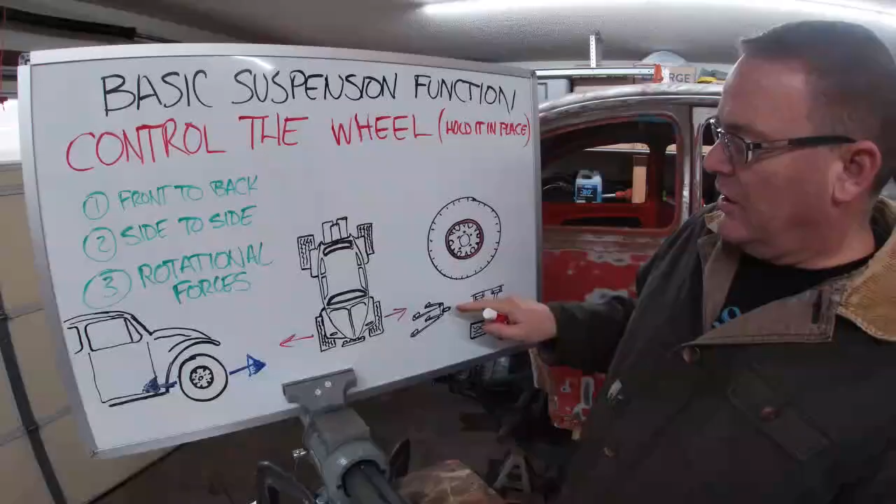Now this is going to sound weird, but you've also got to keep it from spinning. How you do that is basically the upper and lower ball joints, or in my case I'm going to be using Heims - they hold it. So when the wheel turns or when I hit the gas, it's not going to move. It keeps the rotational forces down.

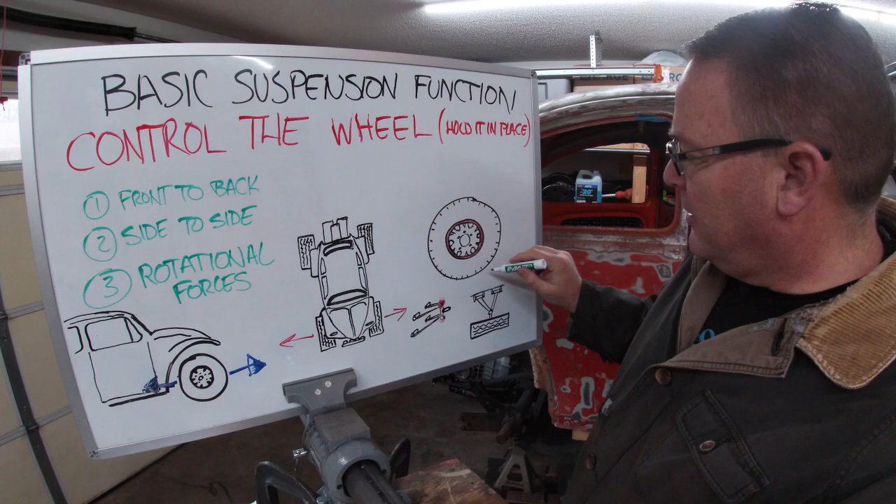Let's say you hit the gas - this is the front. If you hit the gas and the wheel spins, that's it going this way. Well, Newton's law: for every action there's an equal and opposite reaction. That means as you're spinning this way, the equal and opposite rotational reaction is spinning this way. And that's how you do wheelies - you hit the gas, and what does it do? It picks up the front end. The reason it can pick up the front end instead of having the tire just roll and fly off your car is because it's fixed to the suspension, and the suspension keeps the rotational forces in check.

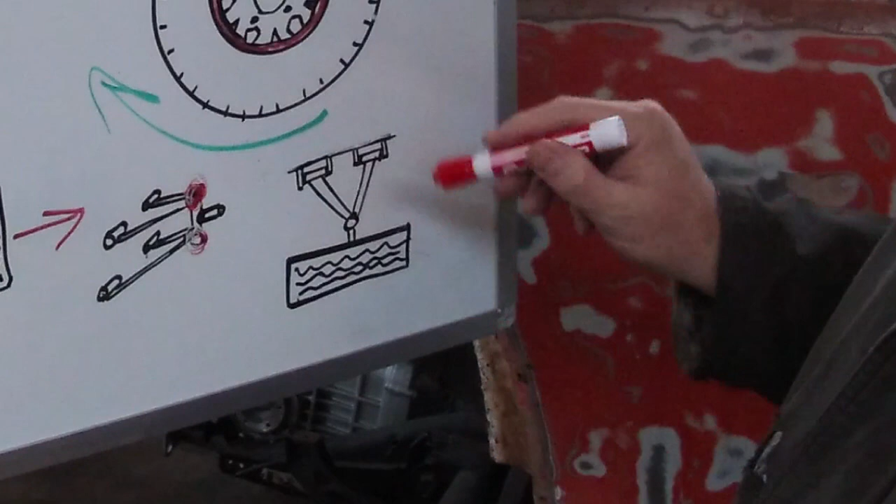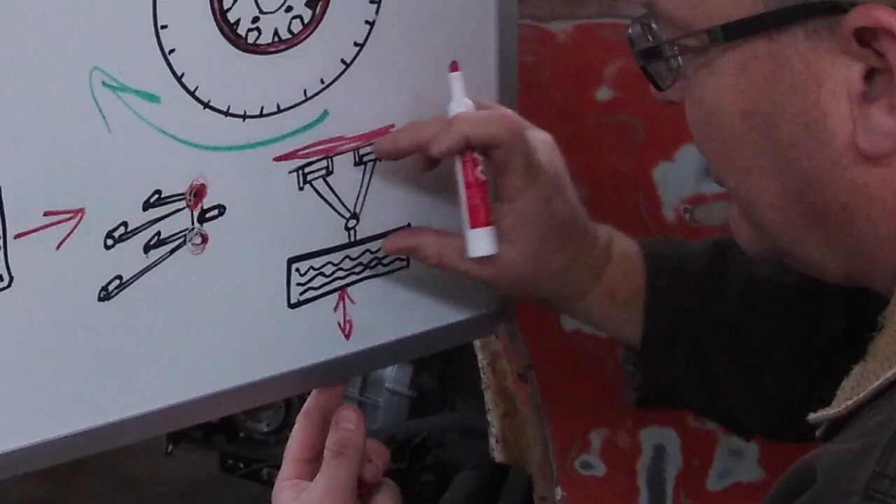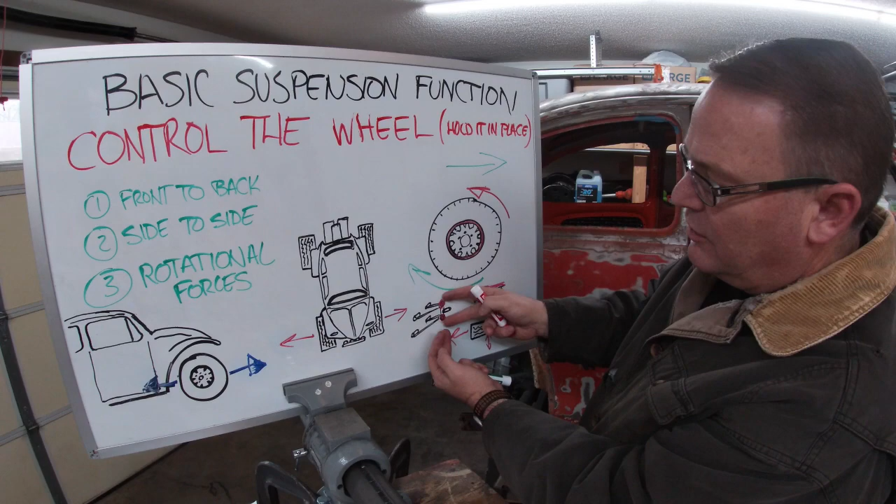Similarly with the A-arm suspension - this is just a quick top view - the A-arm itself, connecting it to the frame here, this triangle motion not only holds it side to side, but also holds it front to back. And because we're using two A-arms, an upper and lower, it's keeping it from spinning. So as you apply the brakes, or on the back apply the gas, these two points hold it in place, and therefore it can't twist off your car.

What I really want to talk about is the planning that goes into finding your overall vehicle width. If you're planning out your A-arm suspension, what do you need to figure out? There are basically five measurements you need if you're trying to figure out your overall width.

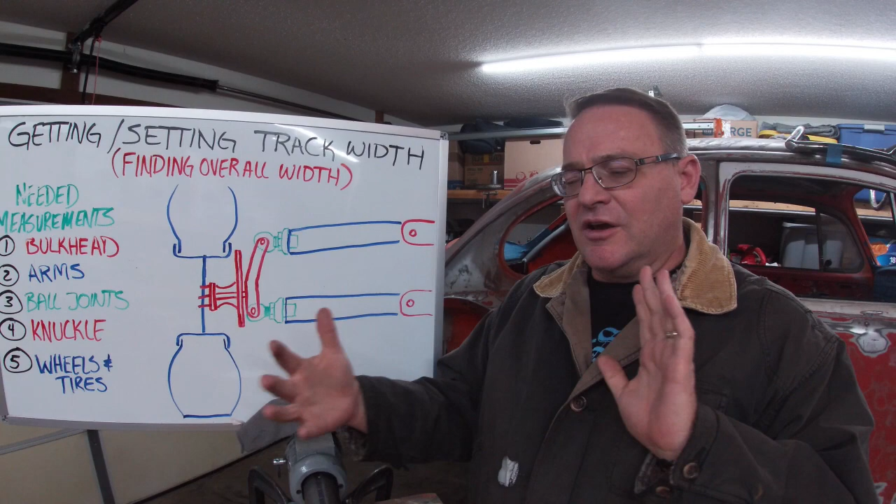For me, I'm looking for somewhere in the neighborhood of 76-ish inches of total width. That's what I would like. So the way I go ahead and do that is I need to know key information.

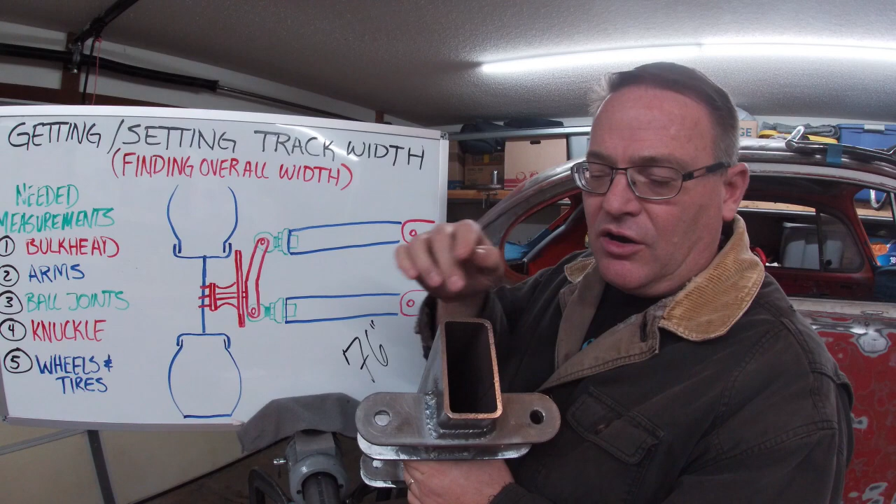First, the bulkhead - how wide is my bulkhead? Like you saw in the last video, I built my bulkhead. I'm using the shackles as my tabs, and they are center to center 6 inches. So this measurement here is 3, because that's only half - so you've got 3 inches there.

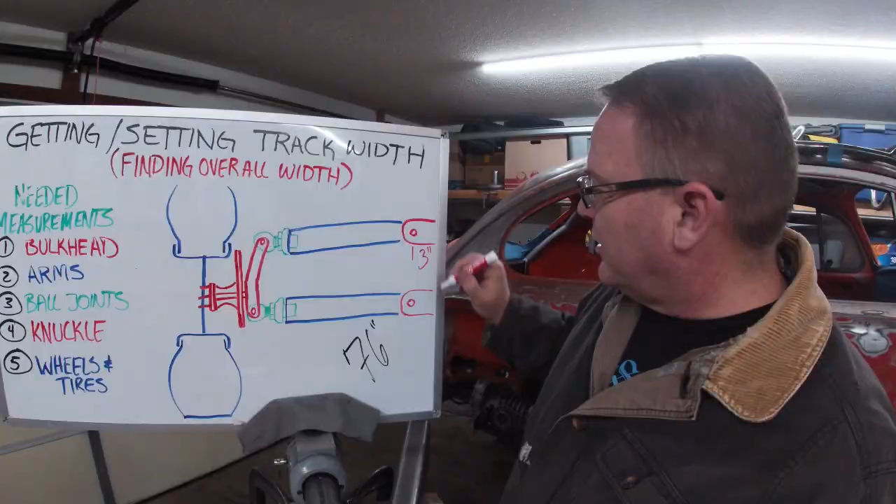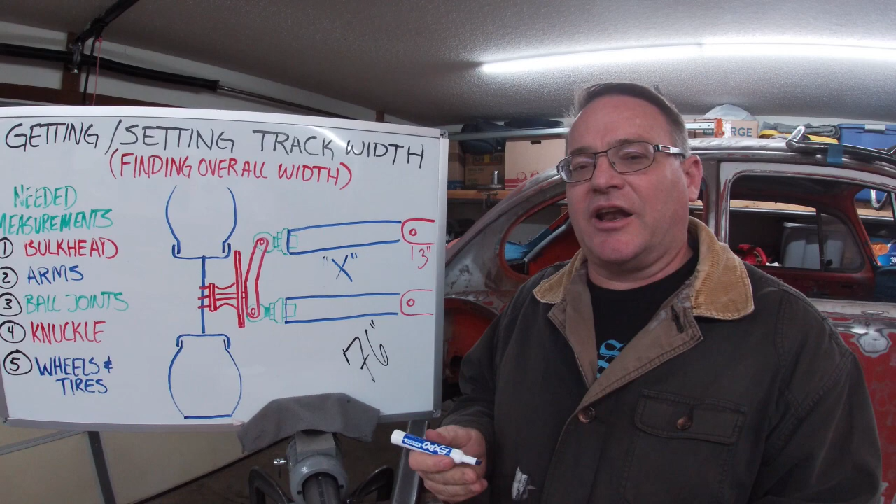The next measurement is your arms themselves, the A-arms. We're going to call that X because that's a variable - I could change that to make it so I hit my number.

So the A-arm length is from the center of the pivot to the end of the arm.

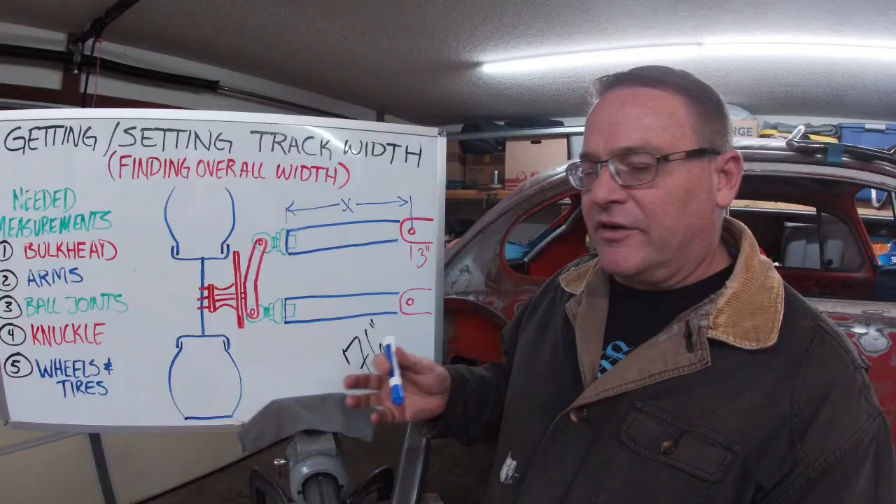The next one is the ball joints or the heims. I'm using a heim. Some of you guys have arms, you'll see them, I'll put a couple pictures. Some of the arms have the ball joint incorporated in the arm. If that's the case, you just take the overall width of the arm. But because I'm using weld-on bungs, I go from the end of the arm to the center of the ball joint or the heim.

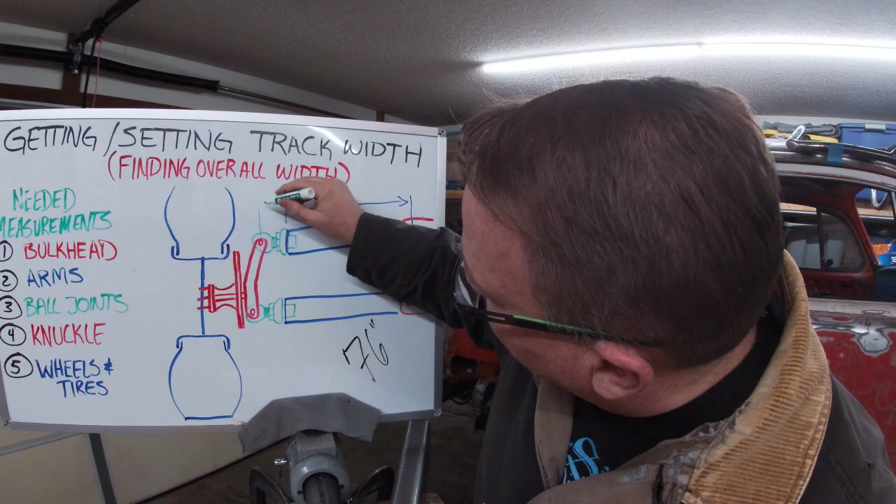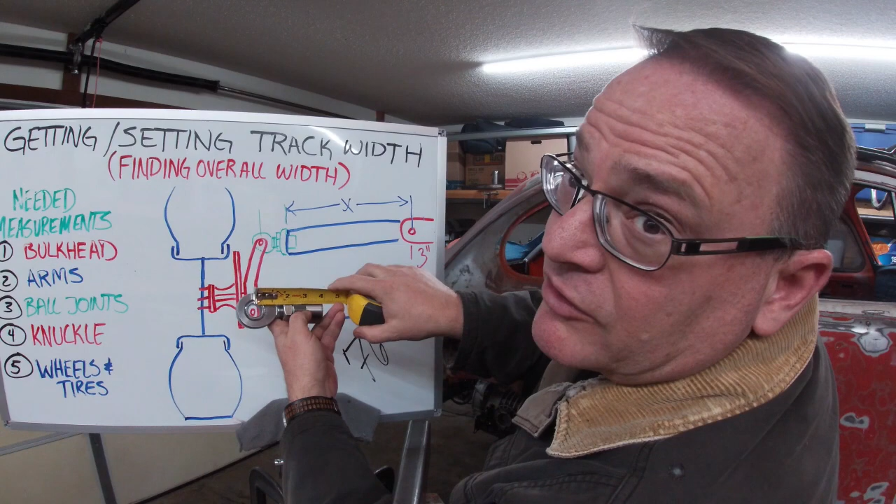So this is my heim. Take a measurement from the end of the heim or the end of the weld-on bung to the center of the heim, and that looks like 2 inches to me. So that is 2 inches.

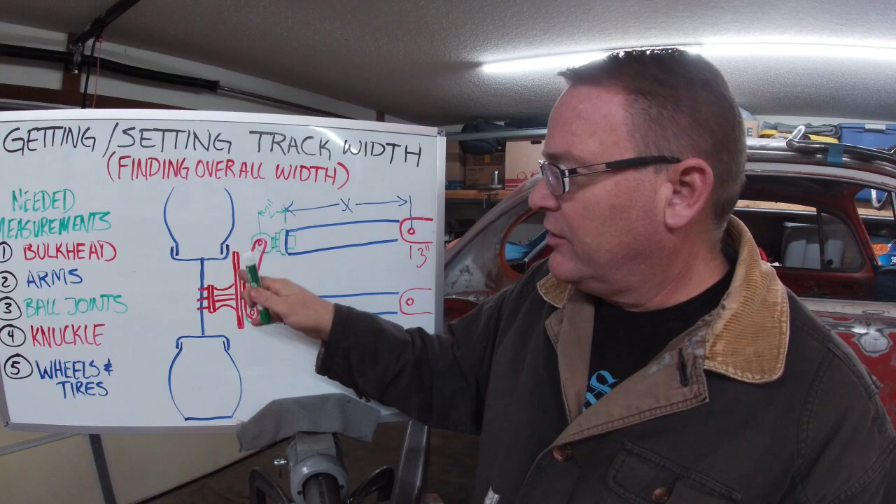Now let's figure out your knuckle. This is the knuckle. Basically, I just got an off-the-shelf buggy knuckle, this one I got from Apple Tree. They sell them also at Kartek, so you could actually get these wherever you like. Mine has, you get them in different sizes. I got mine in the 2-inch hollow.

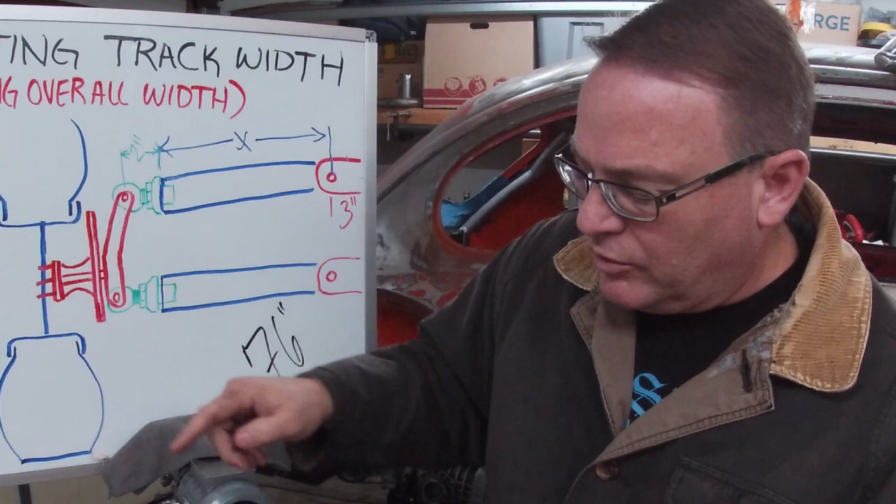Now, when you're getting the measurement of the knuckle, you need to have your brakes as well, because what you're going to do is go from the center of the ball joint slash heim to the wheel mounting surface. So I have my brakes here, and this will fit just like that. So what I did is I combined my knuckle with the hub and the brakes and everything, and then got the measurement from there. Now, I'm not going to do it good here, but

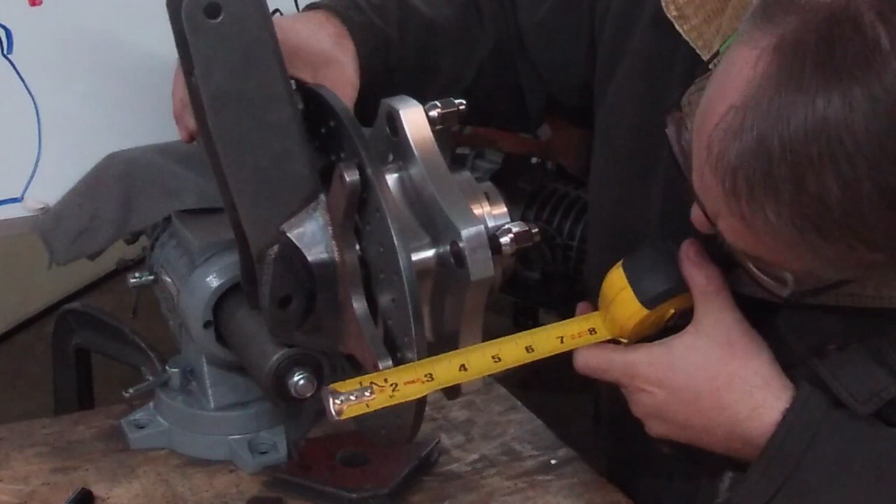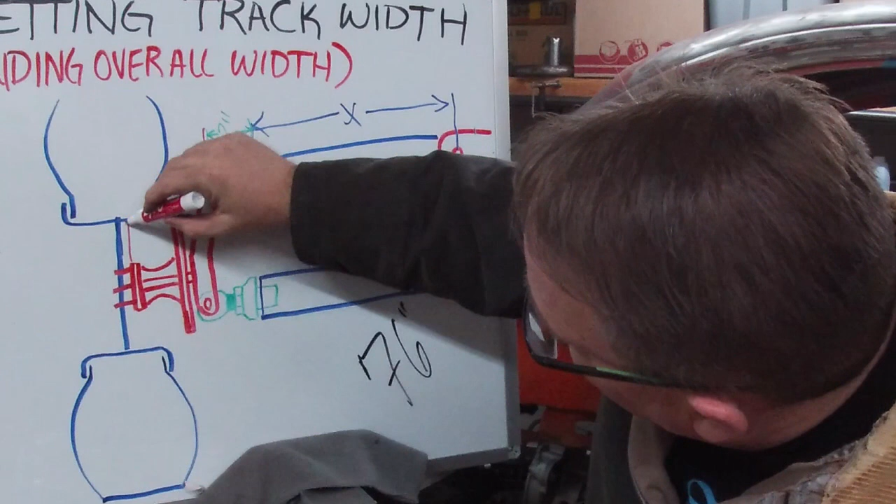Trust me when I tell you it was 5 inches. See if I can get close. Yep, pretty much. Again, I'm going from the center of this to the outward face of this, because this is where my wheel mounts. So that's 5 inches. Again, you're gonna need your hubs and your knuckle to figure that out. I always keep my spindle lock nut on just to protect the threads. So from this point to this point is 5 inches.

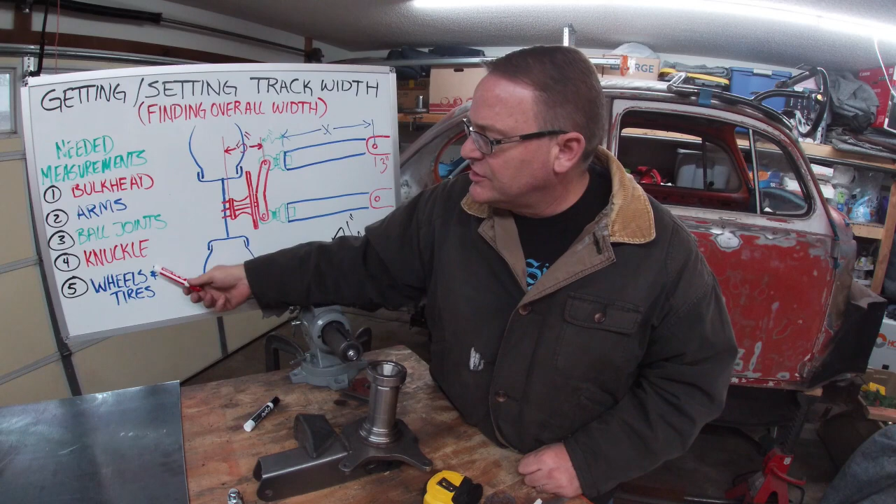All right, so we've got the bulkhead, 3 inches, the arms question mark, ball joints 2 inches. I should have put that down here, but it doesn't matter. Knuckle, 5 inches. The last one is the wheels and tires.

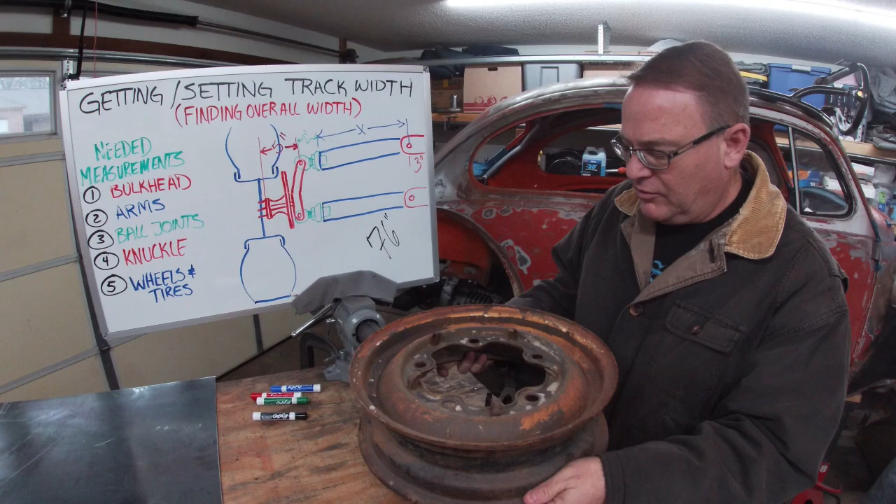All right, I'm just playing around. Probably notice I do that quite a bit. So I am going to mount this stock rim to my hub. Oh, anyway, so yeah, that's it.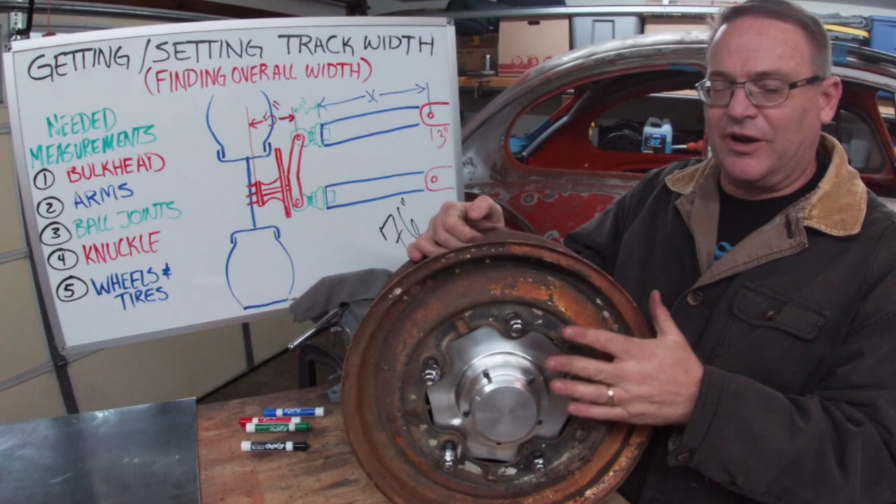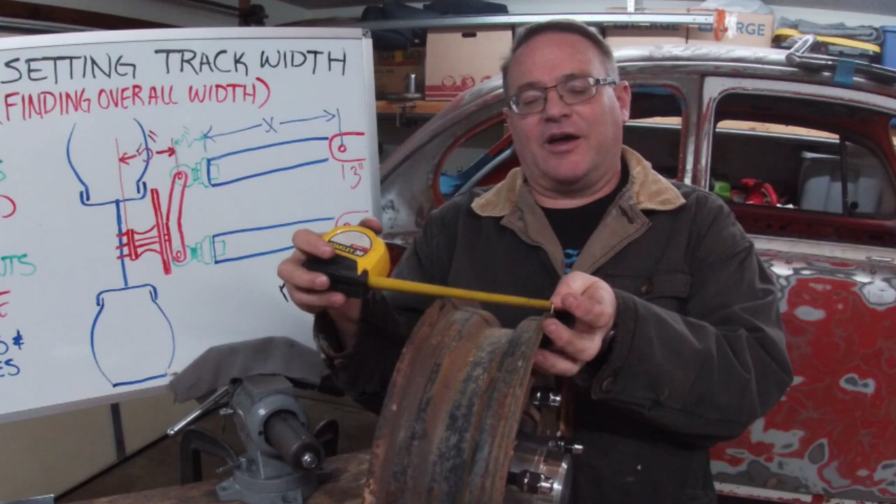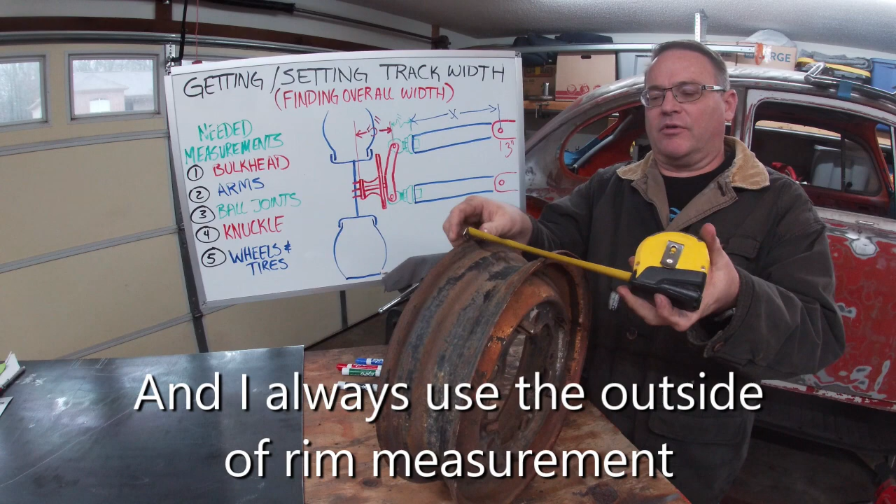So what you want to do is, whatever rims that you decide on, these are 15 by 5, I think, or 4, depends on which side you go on. If you go to the outside, it's 5. If you go onto the inside, it's 4. So how do you figure out what kind of width you're going to get out of these? I'm just going to use this as a 5-inch wide rim, okay, even though it's probably 4 because it goes to the inside. But because it's on the outside, you'll see why I'm going to measure from the outside and use that measurement in a second.

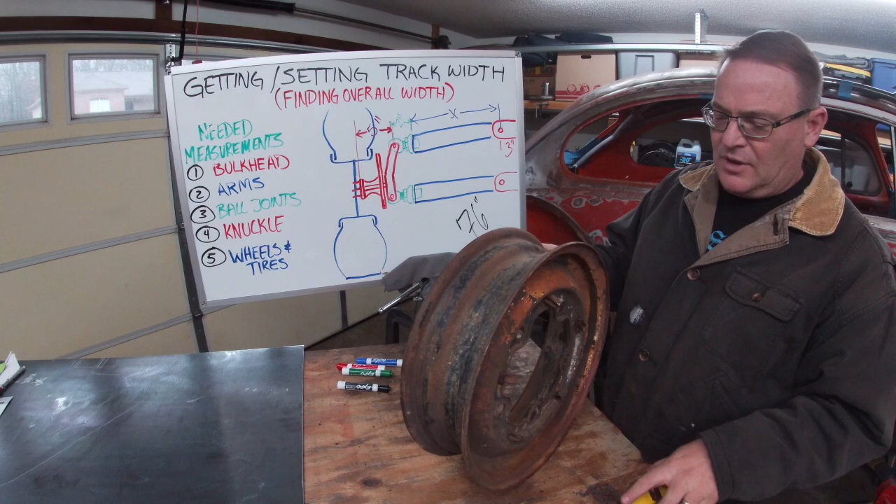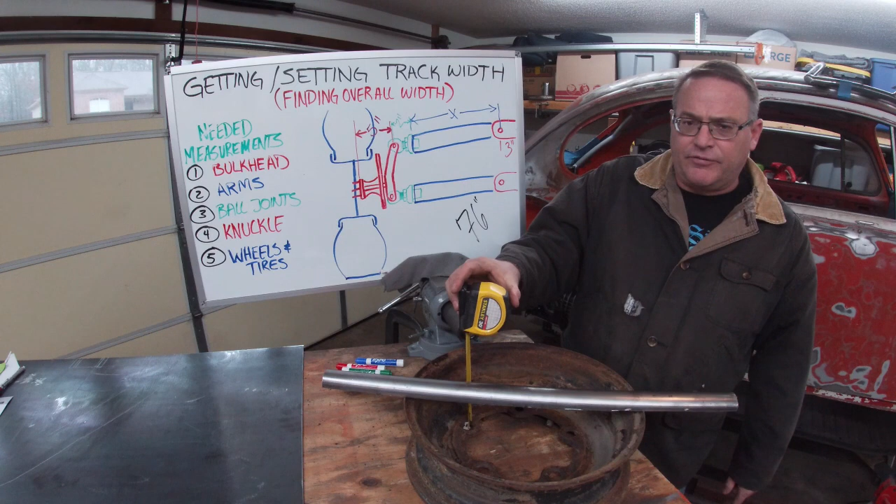Now I need to find out what the back spacing is. The back spacing is typically measured and printed in here, but I can't find it, there's too much crap, I need to sandblast this thing in order to see it. So what I do is I find a straight edge, put it down, and I'm measuring to where the tire or the rim is going to sit against the hub. So that is 4 inches. It's a 5-inch wheel with a 4-inch back spacing. That's insane. So 4 inches, right?

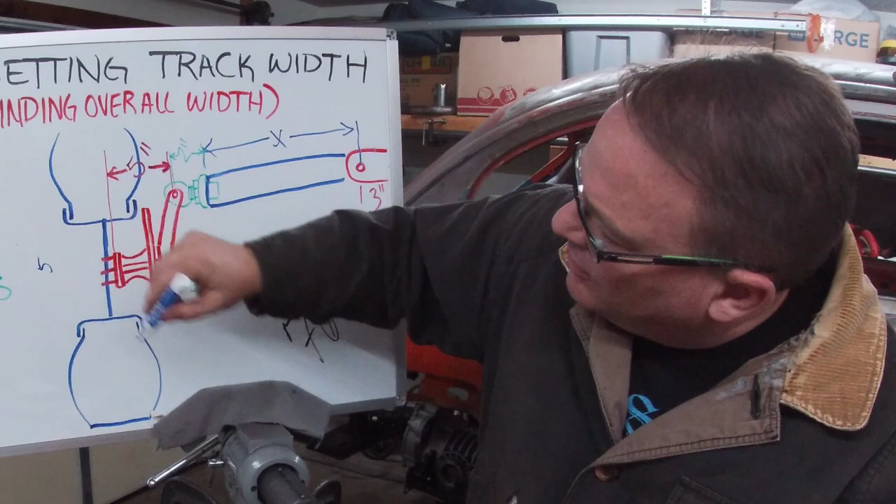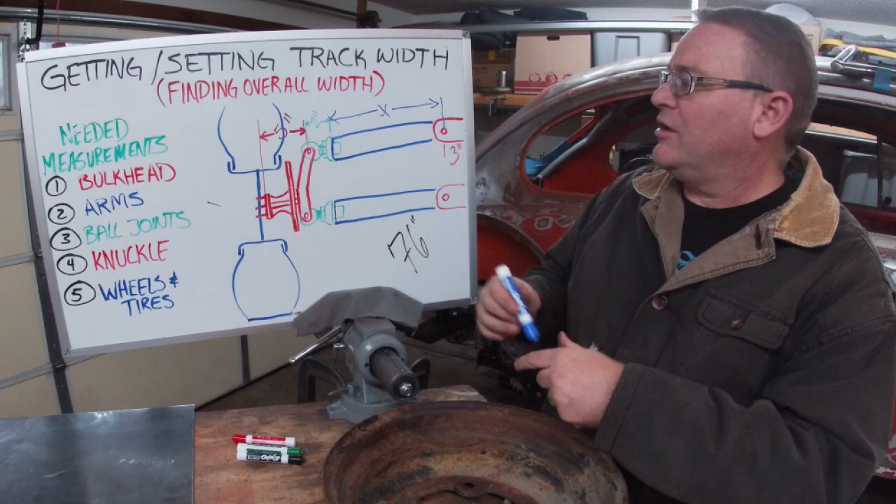So you're going to take the width of your rim, which is 5 on this one, and then you're going to subtract the back spacing, which is 4, so that brings that down to 1. And then you need the width of your tire. Whatever you're using on yours, some guys put really skinny tires up front. I'm actually going to go with a 10 to 10 and a half.

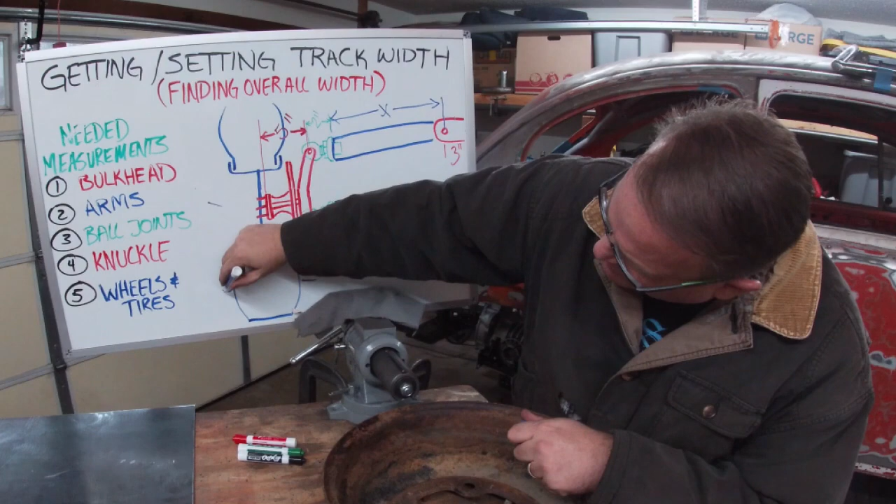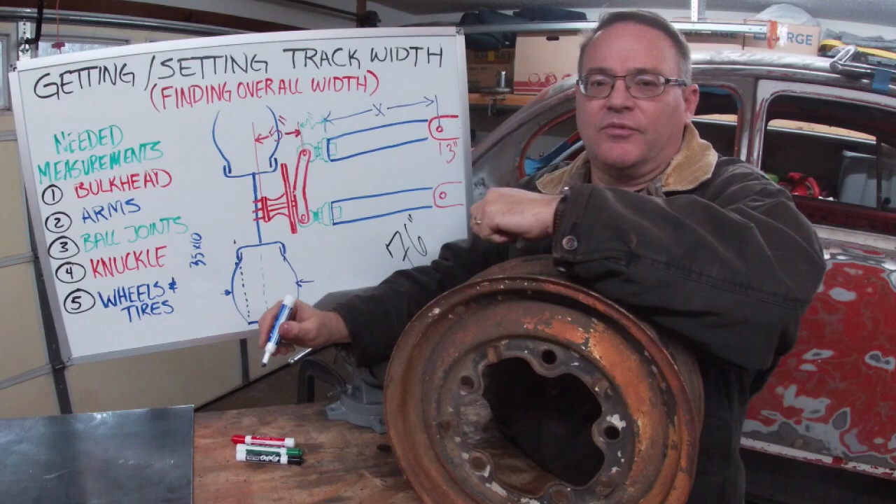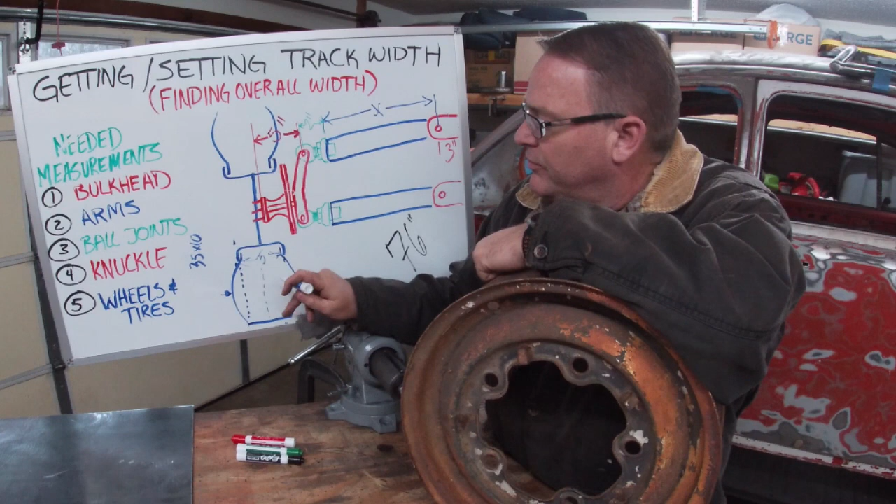So if I was going to use this tire or this rim on my setup, I'm going to be using a 35 by 10 tire, and the rim, as we just measured it, is 5 inches wide there. Okay, how much is this bubble gonna be? So if I got a 10-inch wide tire and a 5-inch wide rim, that means each side is gonna be 2.5 inches bubbled out.

All right, guys, I had to take a little bit of a break. Had to warm up my markers. They started to freeze up on me.

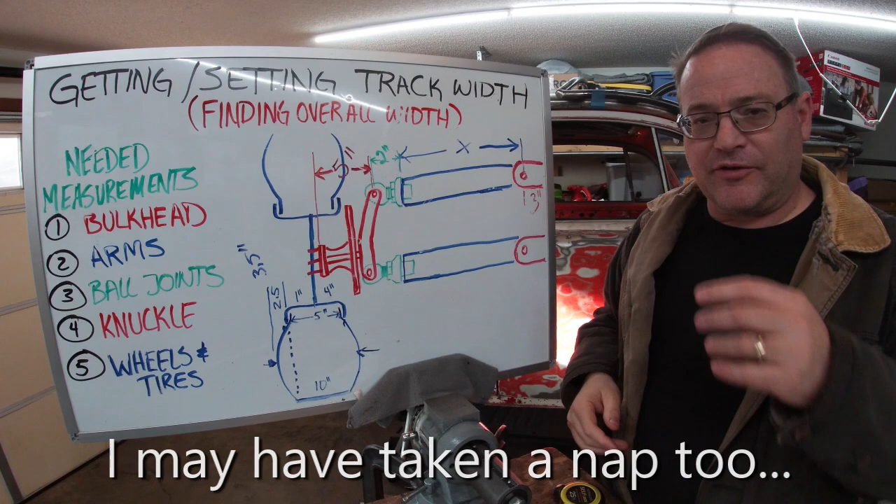But anyway, what I was saying is, since on this setup with the stock rim, a 5-inch rim on a 10-inch tire, I'm gonna have a 2.5-inch bulge on each side. You take that 2.5, you add the 1 inch from what was left on the other side of the mounting surface. So for me on this setup that would be 1 inch plus 2.5, which gives me a 3.5 wheel mount to the outside of the tire.

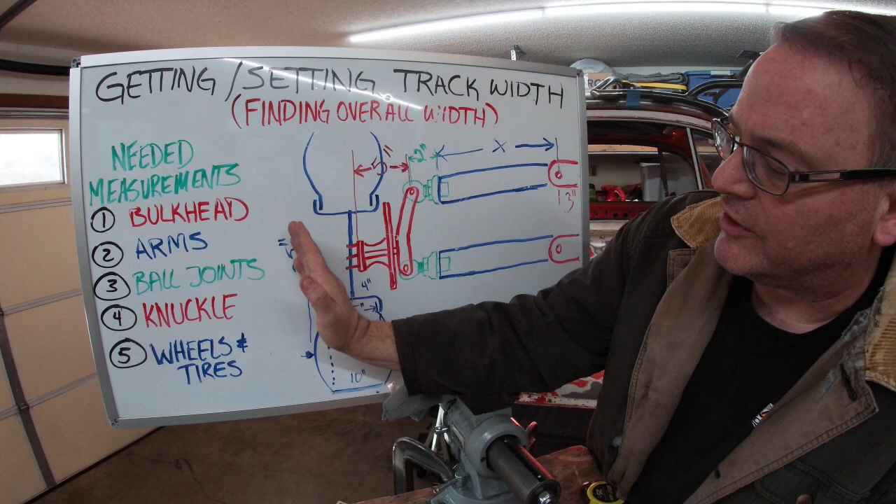So now I could plug all that in. All right, so doing the quick math, I want a 76-inch total width, but that's got to be cut in half because we're only dealing with half the suspension. So half of 76 is 38.

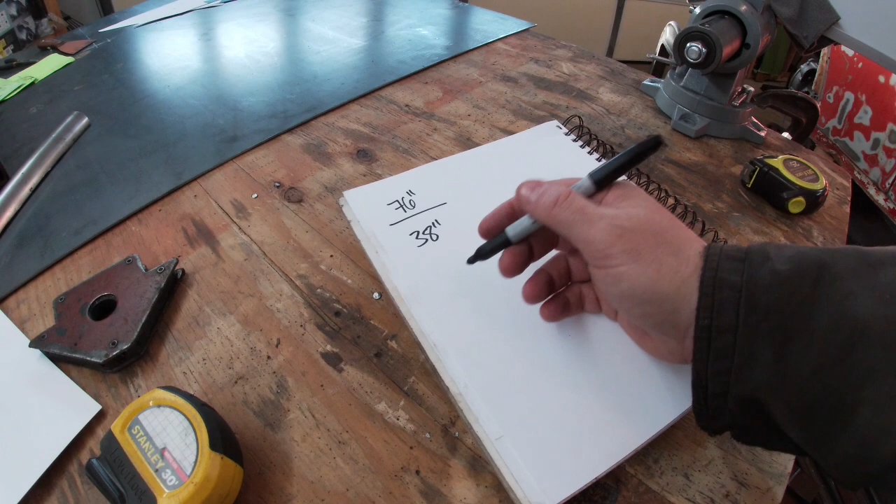Now we just fill in the stuff that we have, and actually I'm just going to subtract off the stuff I know, and that will leave me with how long my arm needs to be. So we have minus 3 inches at the bulkhead for the pivots, minus 2 inches at the heim or the ball joint, minus 5 inches for the knuckle, and then minus 3.5 for the stock wheels with a 35 by 10 tire.

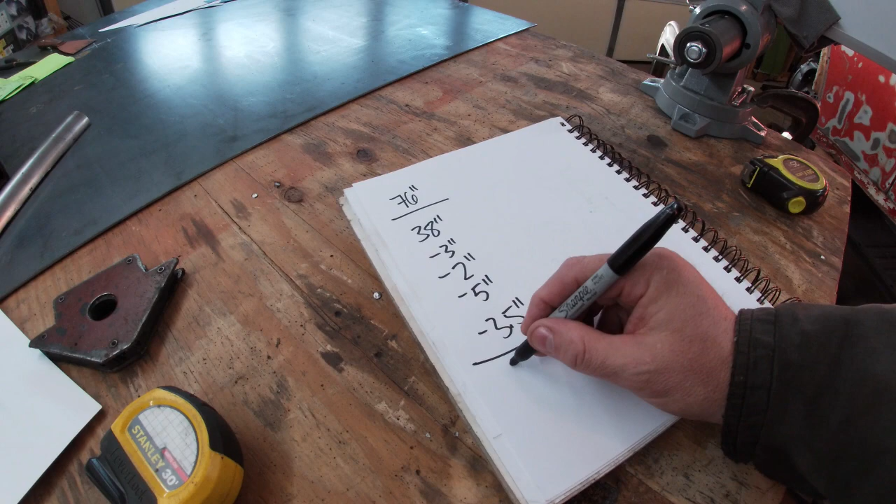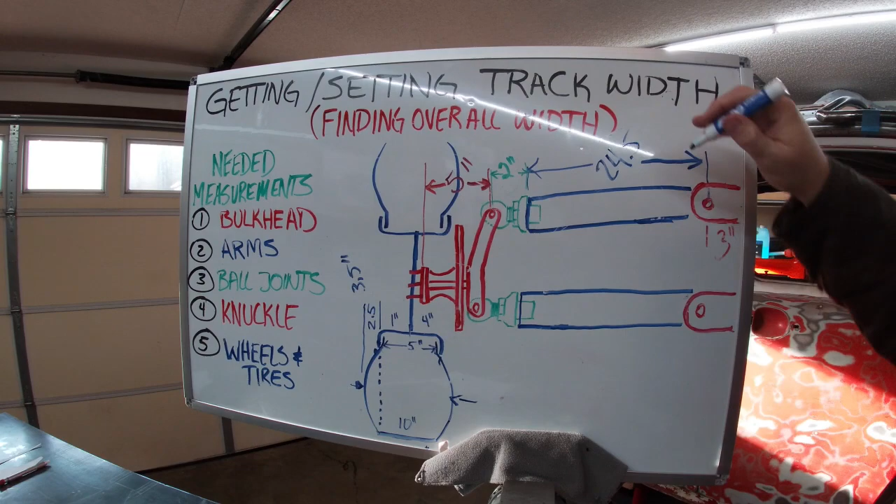Okay, and if you subtract all that out, so 3 and 2 make 5, quick math, 5 and 5 is 10, so that goes to 28. 28 minus 3.5 would be 24.5. So now we know, to get a 76-inch wheel mounting width, I need 24.5 inch arms. It's a pretty decent size arm.

So should I build my arms at 24.5? And the answer to that question is probably not. And the reason why is this: different tires and different wheels have different offsets.

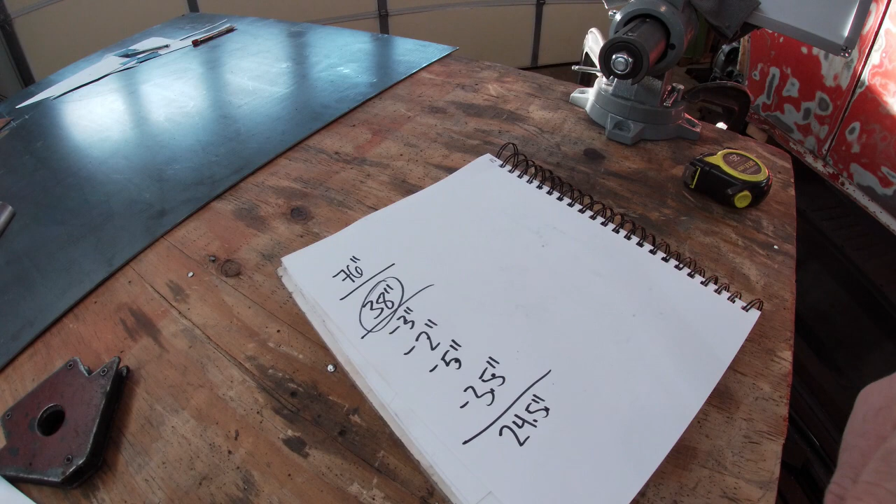So let's take another wheel, like I just checked online, a standard or very popular one that we see every day on Baja Bugs, a beadlock, a 15 by 7 that has a different offset, and let's see what that does to the length of our arm. So the wheel I'm thinking about is a 15 by 7 with a 2.25 offset, okay?

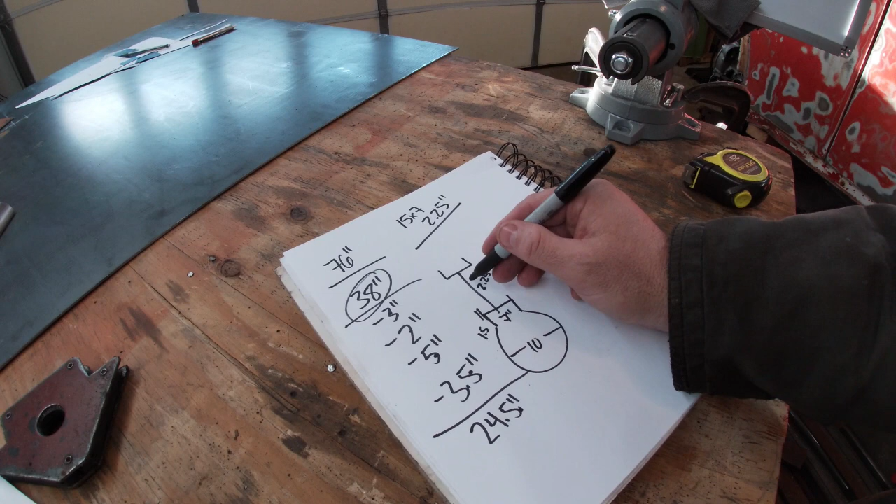If you take a look at our picture, we got a 7-inch rim width from there to there. We still have our 10-inch tire. So a 10-inch tire, the outside, that'd be 3 difference, right? 7 minus 10 or 10 minus 7 is 3. That's 1.5 inches on each side. Now with a 7, if it's 2.25 on this side of the wheel mount, then what's it going to be on this side? It's going to be 4.75, right?

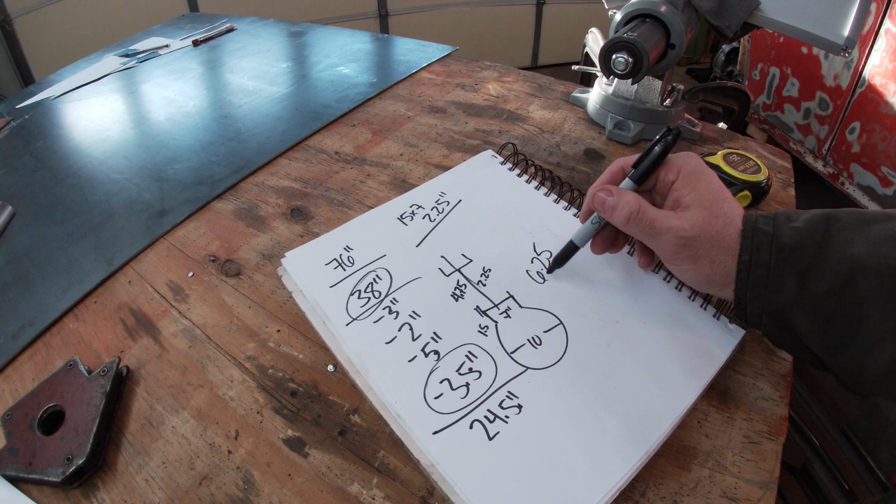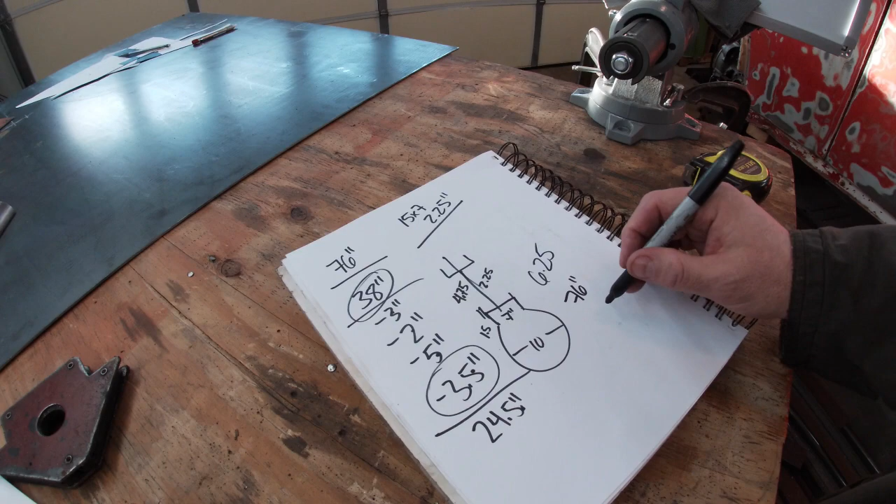So now all of a sudden, we went from a 3.5 on the stock rims to this one is going to be 6.25. So if I built my arms to the stock rims and then switched out to these beadlocks I saw online, I would gain 3 inches per side, basically—well, 2 3/4 inches per side. So that adds basically 5.5. That would take my 76-inch wheel mounting width, outside to outside, to 81.5. Huge difference. And that's the whole reason why I'm going through all of this stuff, because if you're going to be building your own A-arm suspension, you're going to want to set your width.

What I did is I went online and I asked for pictures and asked for people's widths and things of that nature, and I kind of decided where I wanted to be. And the Baja Bugs that I seem to like seem to be in that 76-inch range, so that's why I went there.

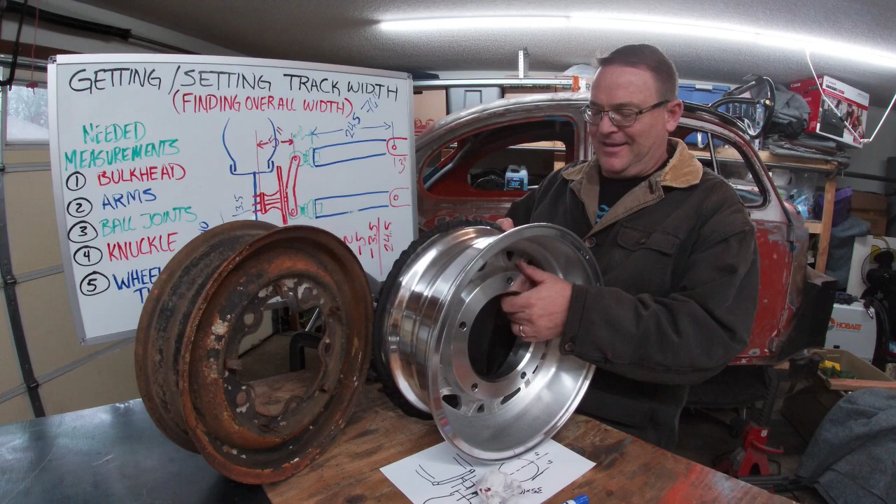Let me just say, Mrs. Claus loves me. Loves me a lot.

Anyway, let's take a look at these actual rims that I'm getting. If you look at this lip and say, hey, that looks a little weird, that's because these are beadlocks, and the outer bead will bolt to the beadlock itself. The ring will bolt to this and squish the tire between these two little nubs. We'll cover that in another video.

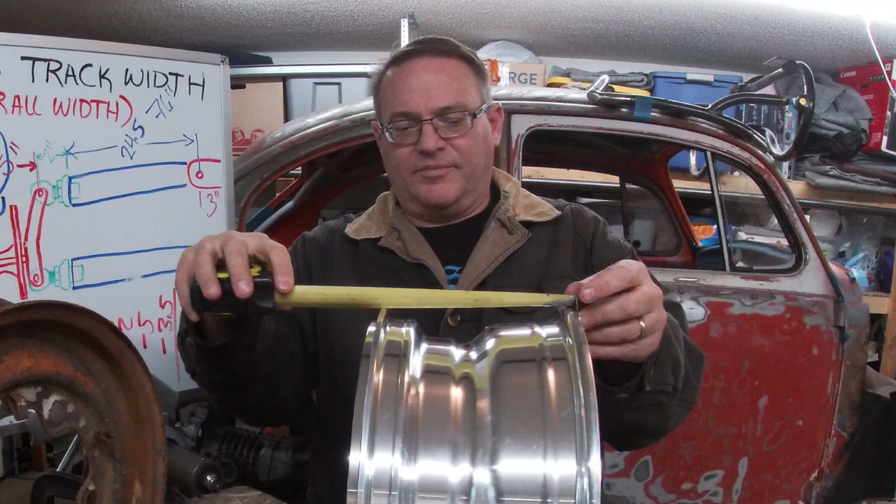So anyway, they said these are 15 by 6.5, and that is to the inside, okay? Now to the outside, if they have the ring on it, they're 8. Okay, don't want to screw up the finish.

All right, here we go. So I had to keep that on. I want to protect the surfaces. This is a brand new rim. Don't want to screw it up, so I'm going to be super careful here. So let's take a look at what the back spacing is.

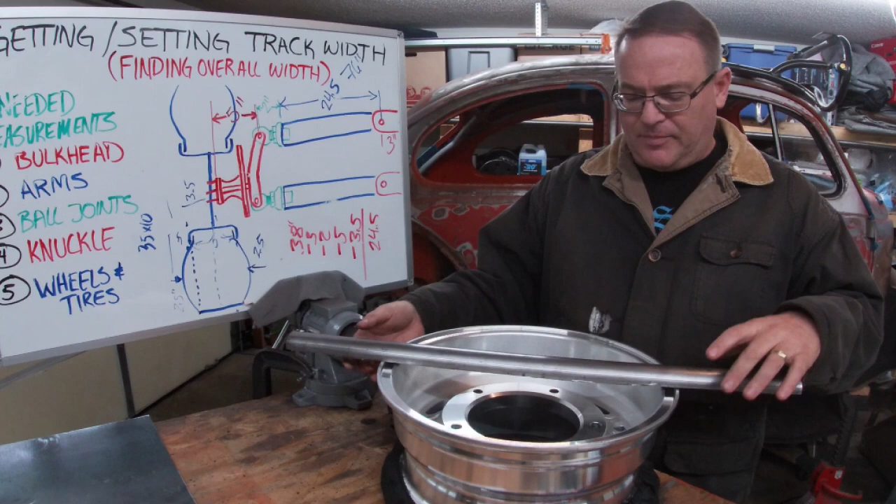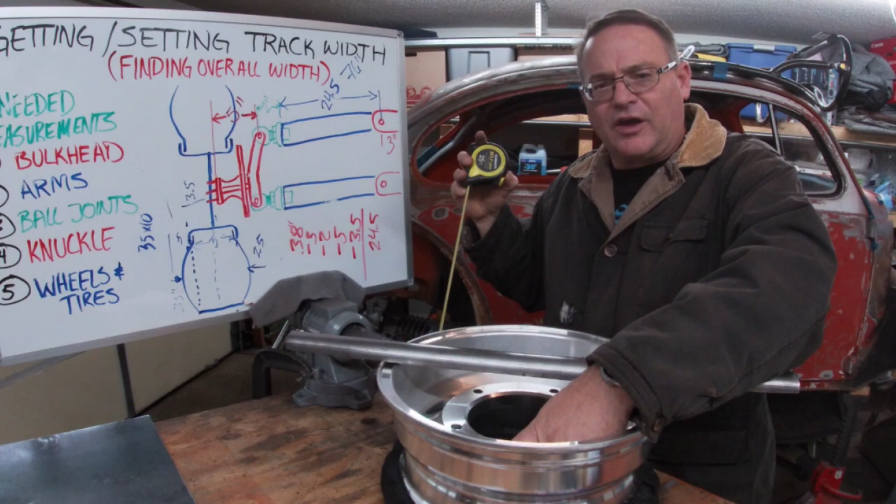2 3/4 back spacing. Damn, that's a thick freak. Okay, these rims are thick. I mean, like thick. This inner ledge. Okay, so...

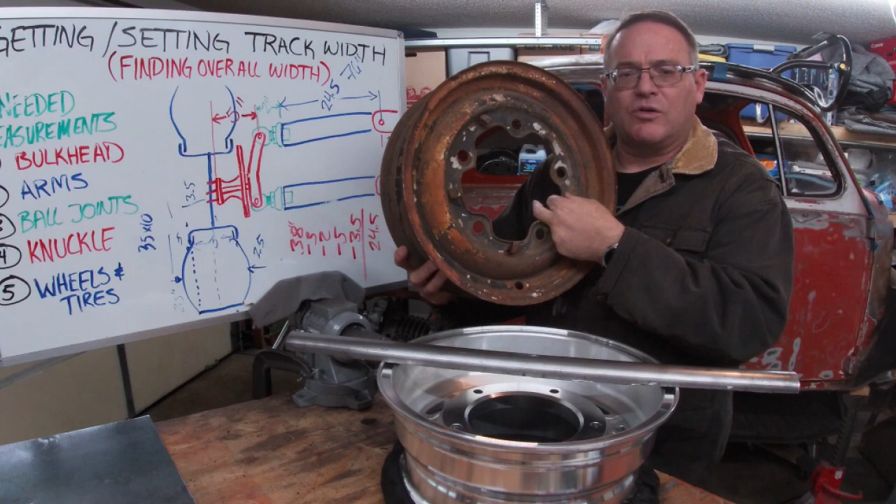Okay, stock rim, dude, it's like nothing. It's like a quarter inch. Someone told me these were strong rims, and now I kind of agree, because that rim is 1 inch thick. It's 1 inch thick aluminum.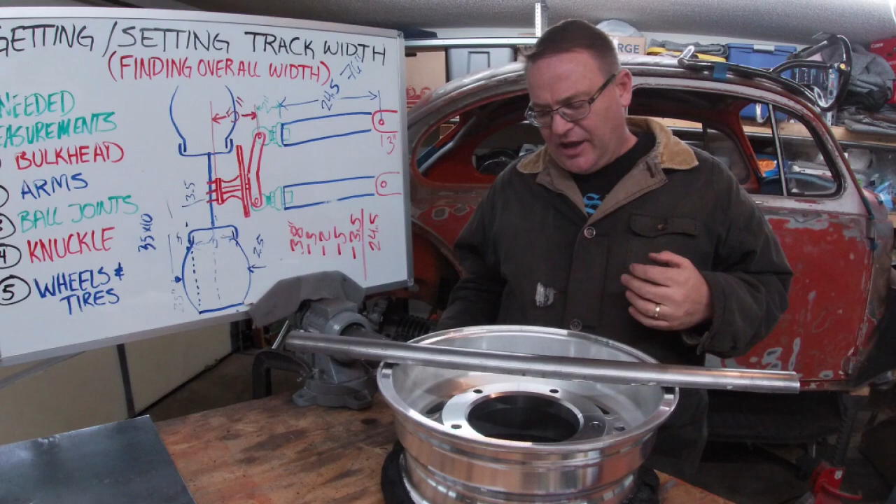Hot dang, dude, that is not going anywhere. And it's not just the wheel mounting width, it's the spokes. So when they said they're extreme use, one might say that they're ultra strong. So anyway, it's 2 3/4.

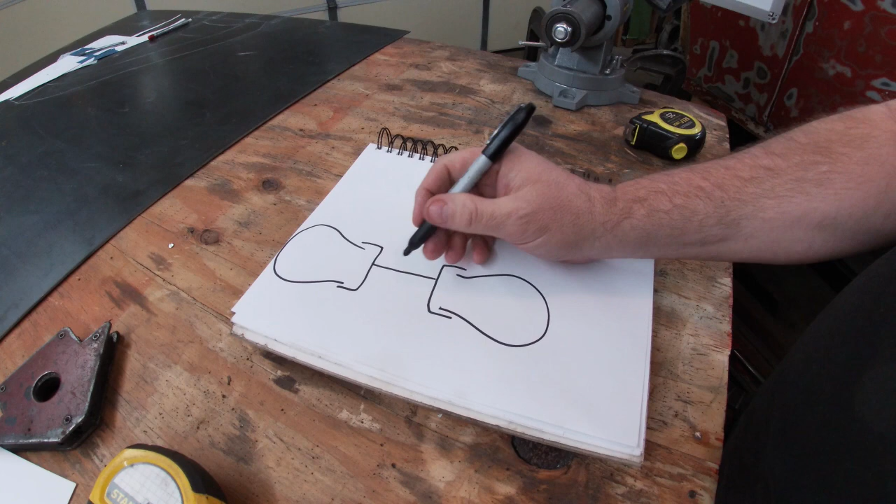So let's do some math. I'm just going to use round numbers to make it easy. The rim is actually like 7.5, but we're going to call it 8. The tire is 10. The back spacing was like 2 3/4, but we're just going to call it 3. So how much is my tire going to stick out past the wheel mounting surface?

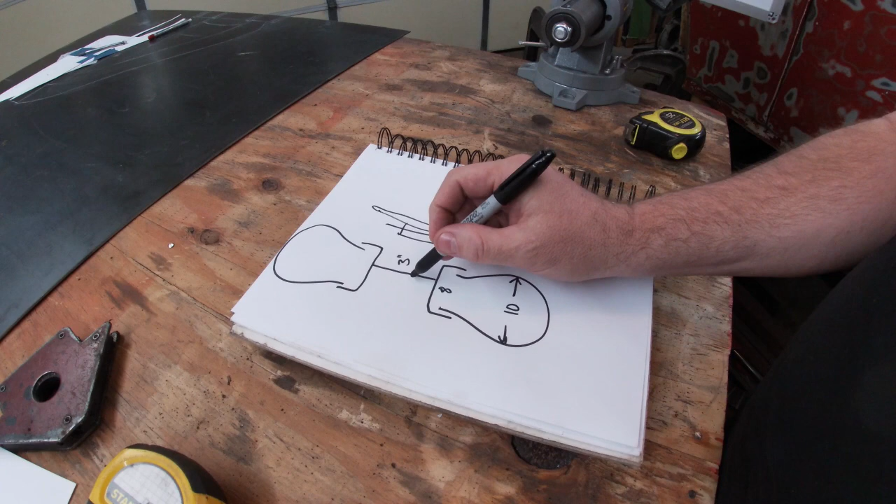If it's 8 inches wide, puts 3 on this side, 5 on that side. If it's 8 inches wide and a 10-inch wide tire, each side is going to have an extra inch of bulge. So you add these two up, 6 inches. Let's plug that in.

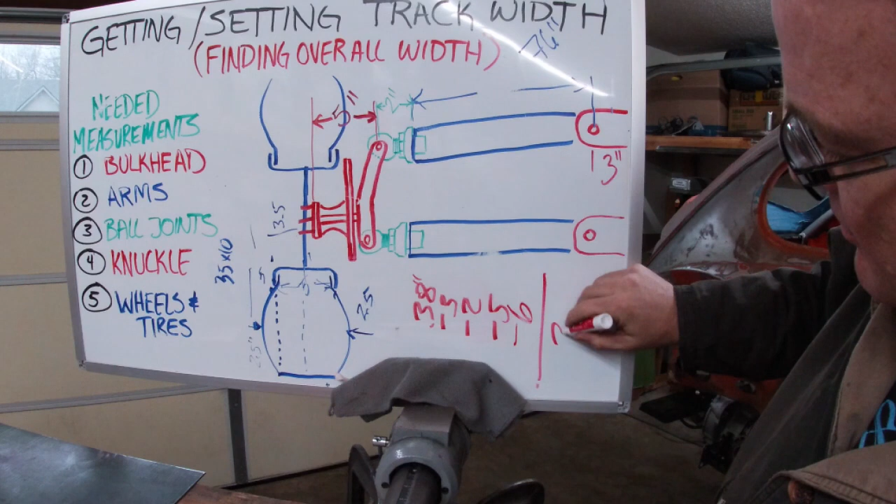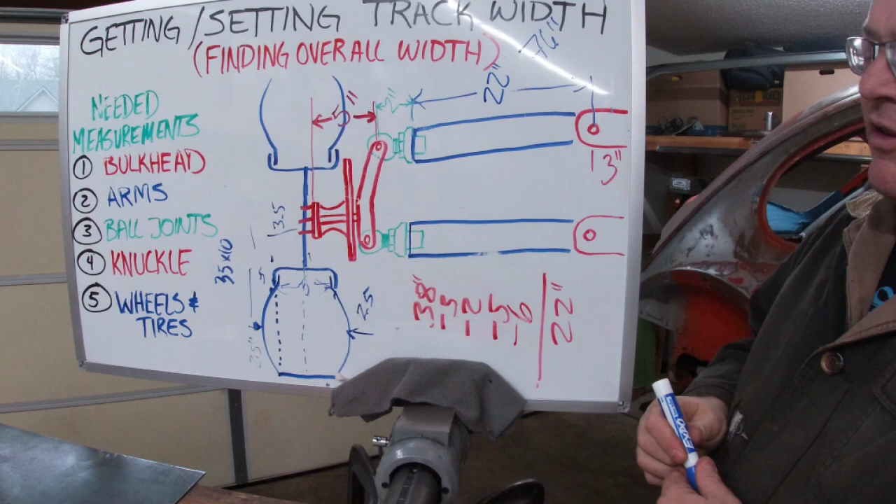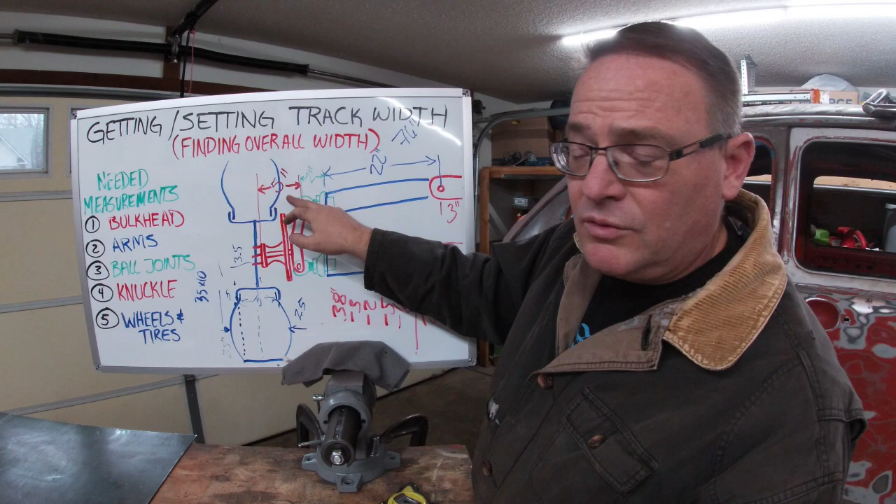Minus 6, right? So I got 38 minus 16. So my new arm width, if I wanted to do 76 inches, is 22. And that tells me all I need to know to make my arms. So we have 3 plus 22, which is 25, plus 2 is 27, plus 5 is 32, plus 6 is 38. And that times 2, because 1 on each side, gives us our 76.

The question is, how big did I make my arms? And my arms are 22.5.

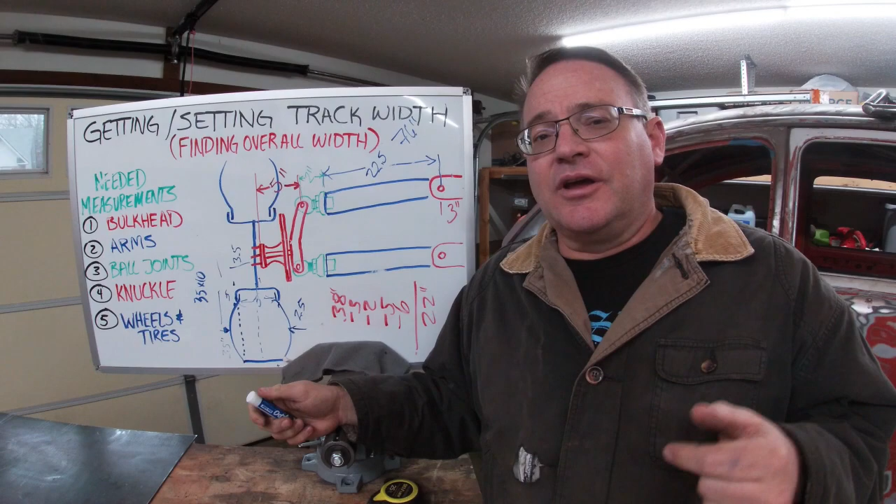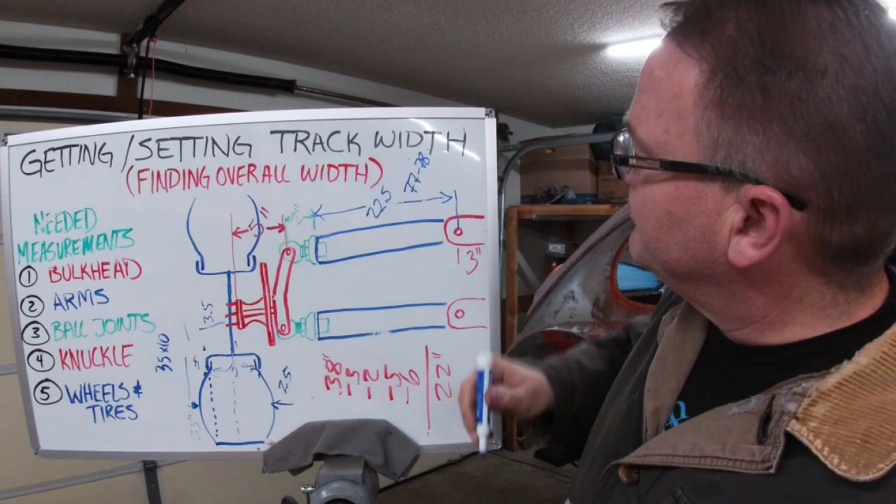In the next video, you'll see me just throwing my arms together, three sheets to the wind type sort of thing, just like the last video. I just kind of started building with these basic numbers in mind. So I'm going to end up in the neighborhood of 77 to 78 total width on my Baja Bug.

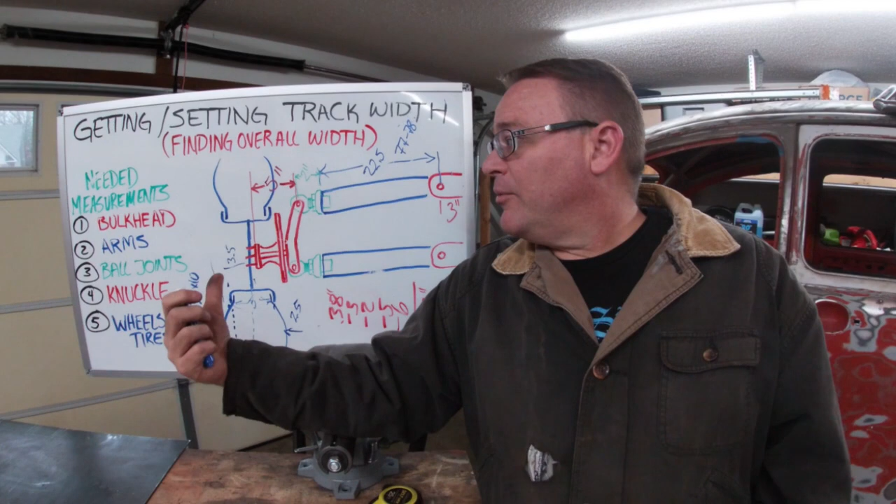Anyway, sorry for all the verbiage. Sorry there's no fabrication here. I just wanted to show you guys how I figured out my total width of my bug and how I planned it out with my A-arms. If you're building your own A-arms, this is how I recommend you do it.

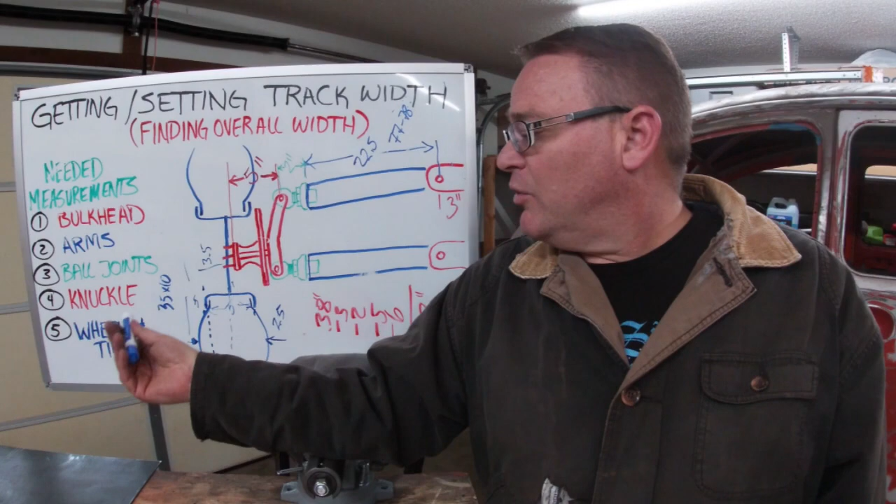Now, of course, you're thinking, well, what about the length of the A-arms and the Ackerman angle and the caster and all that other stuff? We'll cover that later, but this is how you get your width. You'll see as I build the system how you can incorporate those things into your setup.

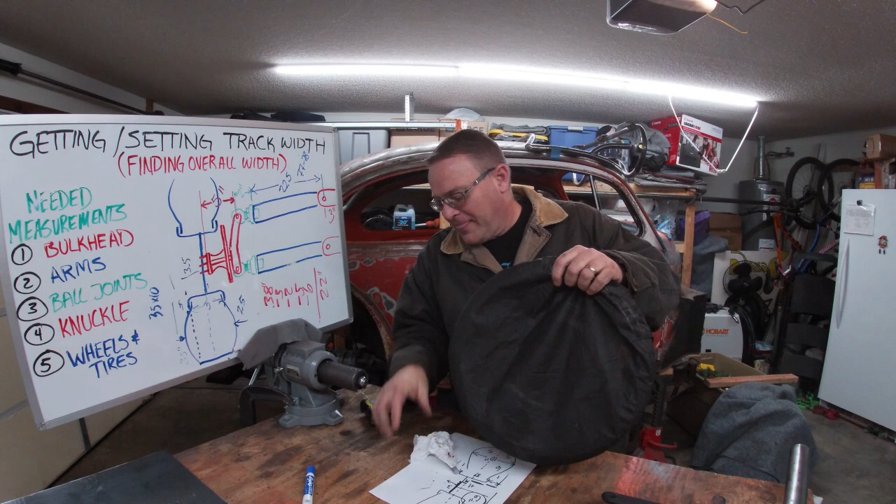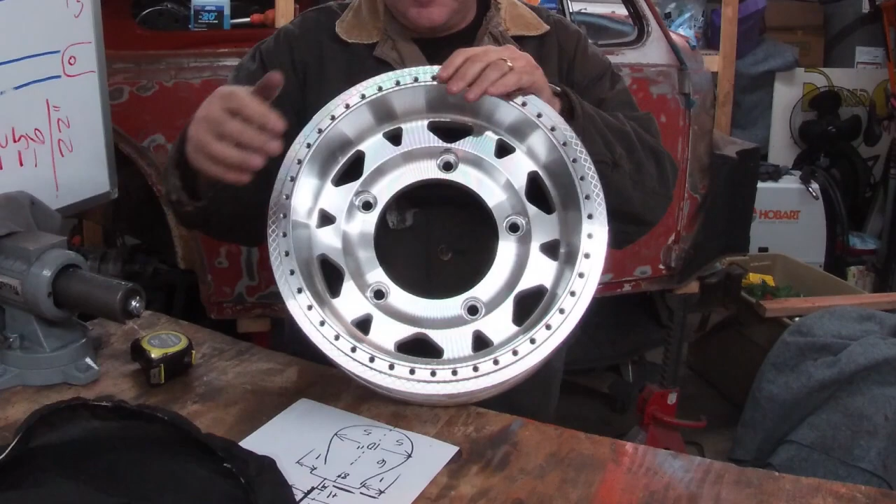Mrs. Claus was very, very, very, very kind to me. Mrs. Claus likes me a lot. These are Ultra Wheel X103s in a 15 by 6.5. And as you can see, true bead locks. And as you saw from my reaction to the thickness of the metal on these things, this is 1 inch thick, guys. I am not kidding.

That is 1 inch thick. Bro, 1 inch thick. These are built to take a beating. The ring on the front of this, it's gonna be awesome. I'm trying to decide whether I'm going to anodize it or paint it or what to match the bug.

But if I don't, look at these freaking rims, dude. These things are awesome. Oh, super, super, super happy with these. Thanks, Mrs. Claus, that'd be Christy, my wife. Anyway, oh, look at that. Look at the shine.